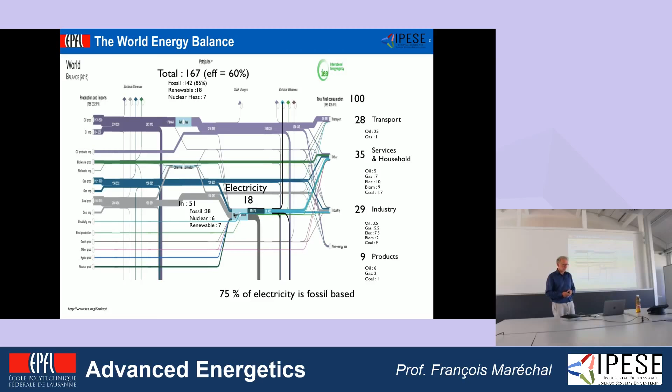Now, if I'm just looking at myself with respect to advanced energetics, what you can see is that you have 30% here that produce 9% of product here. You have refineries that are needed to make the services, but also all the industrial processes here that convert resources into electricity are industrial processes. The same for the distribution of energy; they are all industrial processes, meaning that by looking at industrial processes, we look at the major dimension of energy, the conversion from the resources to the final service and product.

Just to give you some order of magnitude, since I'm speaking about energy, I'm going to use the petajoule, for example, as a reference. So the petajoule... the joule is the way to measure energy.

Each second in the world, we consume the equivalent of 10 trucks of oil. Each second. Okay? And of these 10 tankers, 3 are used for making products, and 1 is for the industry. The rest is used mainly in transportation. Okay?

The gas is mainly used for producing electricity and industrial heat. Coal is in the majority used for electricity and a little bit for industrial heat. And the overall efficiency of electricity production is around 35%. It's just to give you some numbers that allow you to have some orders of magnitude about what we are going to discuss today.

And something which is important: I'm talking about the world because I'm talking to engineers, and you will not be located in a given place or bounded by borders. It's possible that even if you are located in Switzerland, you will work on processes that are in the middle of China. Okay, so there is no border, especially if we talk about technologies. Okay, so we have the big numbers here.

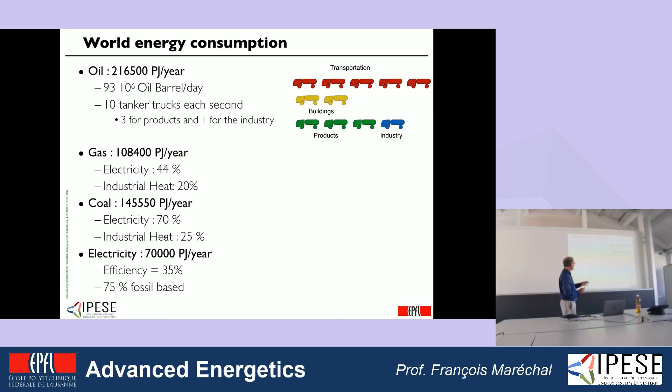Now, if you look at the energy used in the industry, perhaps the most important part here is that around 70% of the energy used in the industry is used in the form of heat, and 30% in the form of electricity. And of course, this varies from one sector to another. There are sectors that consume a lot of electricity, others less.

Something which is perhaps also very important to realize is that there is a very limited amount of renewable energy used in the industry. I would say it's mainly when you have wood boilers used in the industry, and also all the products are more or less only based on fossil resources. So the products are not bioproducts, but fossil-based products. Okay.

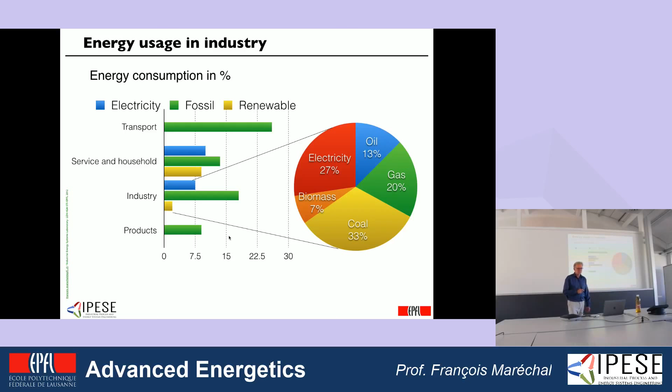Compared to the world, Switzerland is a little bit different, mainly because Switzerland is leaving the heavy industries outside Switzerland, so they prefer to buy steel rather than produce steel, or to buy gasoline instead of producing gasoline. So we have only one refinery in Switzerland. The rest comes directly by trains, trucks, and pipes.

Okay, and that's the reason why the importance of the industry in the energy mix is a little bit less in Switzerland compared to other countries, which are more at the level of 30%. Okay, in Switzerland it is 20.

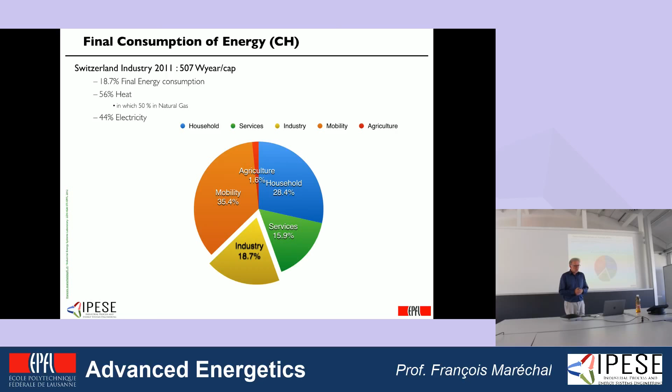So when we are talking about industrial processes, in fact, we are talking about different types of processes. We can have the chemical industry, fertilizer production, fine chemicals, all the additives, so paints and pigments that are added into plastics, for example, or the pharmaceutical industry, which is more what you would picture as an industrial process. But the industry is also the production of cement. It's also the production of steel, and producing food also needs industrial processes.

Okay, you do not just take the milk and put it into a bottle. You have to treat the milk in such a way that you can put it in a bottle in an industrial way. And you can even imagine the production of a car as being part of an industry. To produce a car, you have to melt aluminium, solidify aluminium to make the engine, put the engine into the structure of the car, paint the car, and all those steps require energy as well.

But we can also consider that producing power is an industrial process. If you look at the complexity of coal power plants, you will see that it's indeed, especially today, like a chemical process. But even treating waste is an industrial process, okay? And it's not just burning waste, but burning waste, cleaning the gas, and producing heat and electricity that can be made useful for the rest of the community.

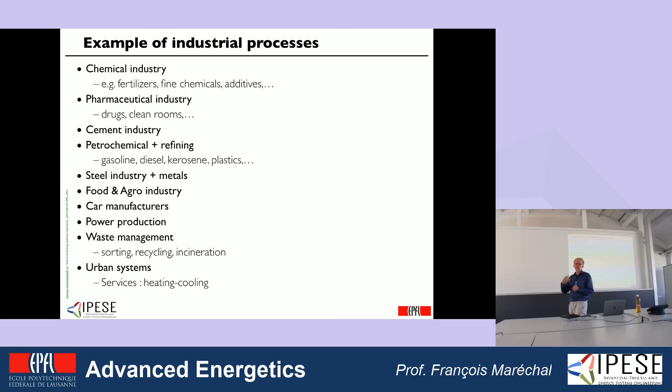And even a city is an industrial process. If you think about a city, not only do you have to heat the city, but you have to light the city, treat the waste, transport the water, prepare the water, and clean the water afterwards. Okay, you have to deal with all the waste produced in the city, and perhaps the best would be to use the waste heat of the industry to heat the city. And if you do this, you do not have to buy natural gas to heat the city, and it would be even more interesting.

Okay, so now the industry is divided into sectors, and the sectors are more or less energy intensive. So, for example, you can see that in Switzerland, the chemistry is by far the biggest, the most energy intensive sector, consuming about 25% of the energy. But then the food and agro, because we have Nestlé in Switzerland, for example. And food typically does not like to be transported over long distances, and therefore people prefer to produce locally, and this corresponds to a certain energy consumption locally.

Of course, in Switzerland, the watch industry is important, the cement afterwards, because we build a lot of buildings, paper, etc. So the steel is quite small. And something which is interesting when you look at this energy intensity, you can see that there are some processes that require a lot of heat, majority heat and a small amount of electricity, like cement, for example, and others like the watch industry that mainly use electricity and a very limited amount of heat.

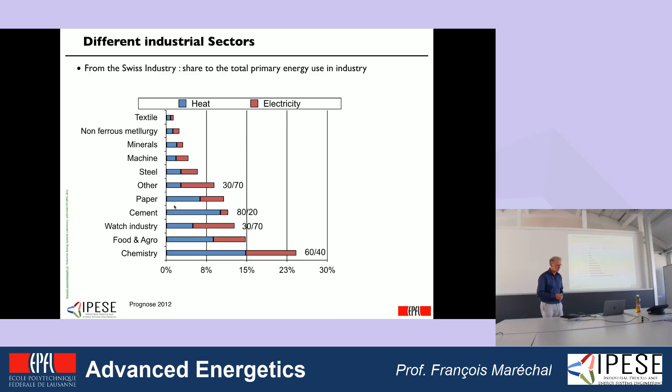Now, what is the challenge of the industry? So you have heard about the energy transition. We voted the energy transition a little more than a year ago, which says that we are not going to renew our nuclear power plants and that we have to comply with our requirements in terms of carbon dioxide emissions, which is going to ask for a strong reduction of the energy consumption. In order to reach this, the industry is asked to reduce by 30% the amount of heat that is consumed and by 36% the amount of electricity. And we have a horizon, 2050, for doing this, right?

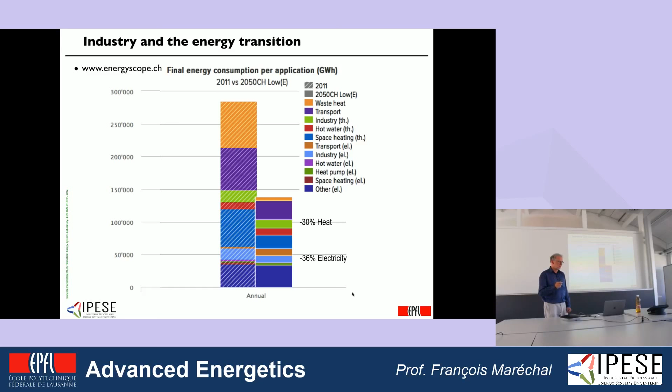And it is the plan of the government, and the government will try to put measures into place in order to realize it, okay? And I would say that a priori, the challenge is on you. In 2 years you will have your diploma. You will be hired in the industry, and you will have to at least realize those targets. Something else is the fact that your company would also like to produce more, because each company wants to grow. And this is going to create an additional difficulty, because if you have to produce more and at the same time reduce the energy consumption by 30%, then you will have to be even more efficient.

Okay, and therefore the challenge is really to understand how the energy is used in industrial processes, so that we will be able to reach the target. And the target is, I want to reduce the amount of energy that is consumed per year while still increasing my production, because I want to increase my revenue, and therefore I will have to compensate the increase of production by improving my energy intensity. And something which is important is that the industry has succeeded up to now. Even though they are increasing the level of production, they have been able to reduce their carbon dioxide emissions, which proves that the industry can do it.

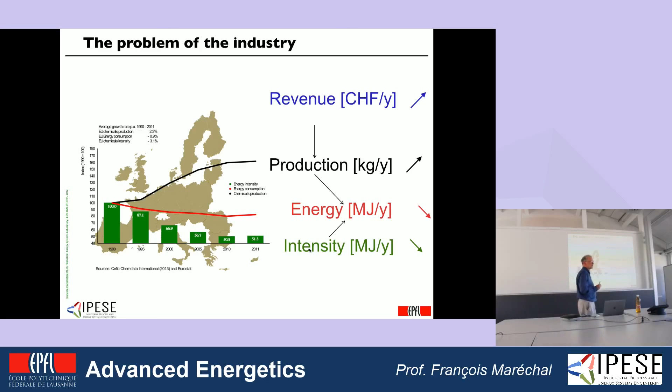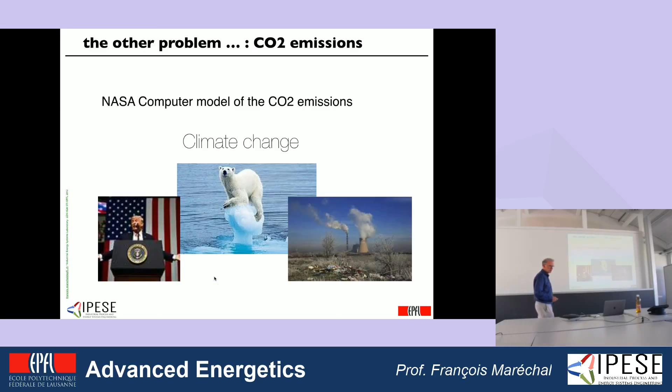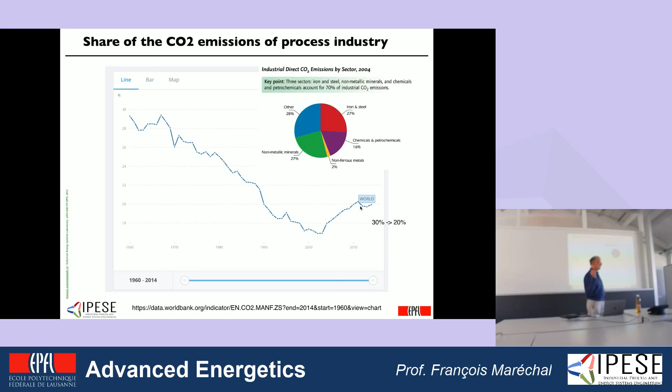So it's the amount of energy needed per kilogram of product, knowing that the amount of product is the amount that we would like to increase, because this will be the way for us to increase our revenues. So the three terms here: the product that will increase, and then the ones related to energy, the energy efficiency, so energy intensity per unit of product, and the CO2 content of the energy that is used, which tells us that we have to try to change the fuels, switching from coal to natural gas, and then from natural gas to bio-natural gas, so that we will reduce the amount of carbon dioxide per unit of energy used inside the processes.

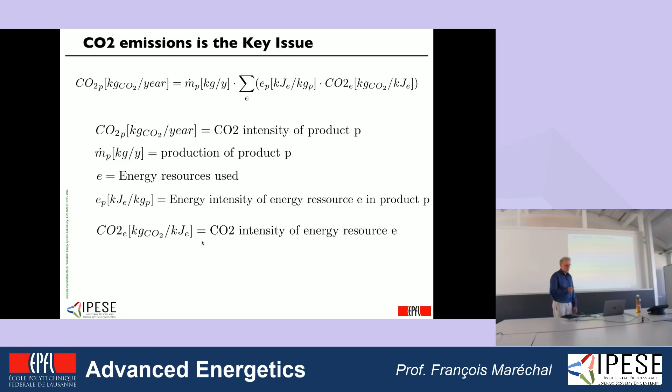When we look at what needs to be done, this is a study from the International Energy Agency. It is declared that half of the effort that is needed in order to reduce the carbon dioxide emissions to a level that is supposed to be satisfactory is coming from efficiency. That's why it's very important to understand the energetics of industrial processes, because we have to increase the efficiency in energy usage. And it is expected that half of the effort is coming from this efficiency.

So typically the International Energy Agency is defining efficiency as being the hidden fuel. Here half of the amount is coming from the increase of efficiency. And then the rest will come from the integration of renewable energy, which means also that we will have to think about how we can integrate renewable energy in industrial processes, right? It's not only for heating buildings, but it will also be for making new products.

And then another dimension which is interesting here is carbon capture and sequestration. So it's the integration of the capture of carbon dioxide. It means that sometimes you will still burn fossil fuel, but you will capture it so that it will not emit carbon dioxide into the atmosphere. And then you will have to find a place to sequestrate it, which is another dimension. So we have to find where we can then store the carbon dioxide that has been sequestrated.

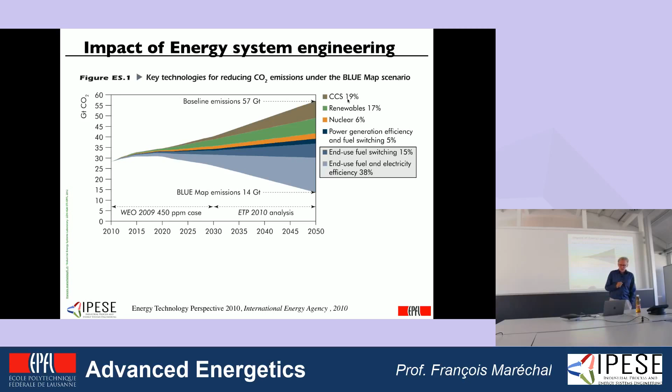Okay, so how do we understand the way energy is used in industrial processes? For doing this, we have to look at what is an industrial process. If I'm defining what is an industrial process, I would say that typically we start with raw materials that we have to transform into products. And what we have to do there is to understand the efficiency of this conversion from the raw materials to products. If we start from a blank page, we will name it

the process design. And just for the anecdote, I was always defining the process as converting raw materials into products, until the time I met people from Nestlé that said, no, we are not interested in producing products, we are interested in satisfying our clients. So our product is in fact not a material, but satisfaction to clients. So we have to be smart, because by changing this approach, they switched from Nescafé production to Nespresso production, which is a completely new, different design. But it's important to realize this: the product can be immaterial.

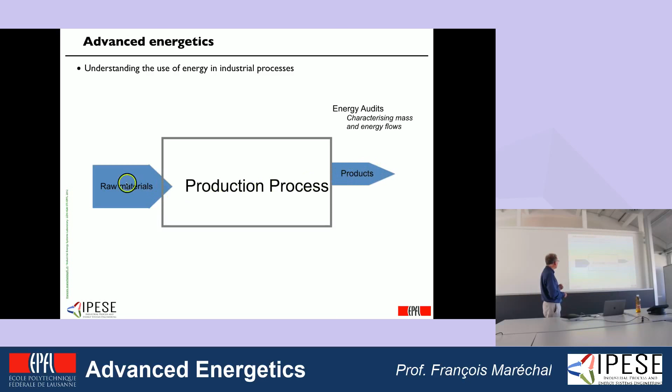But the production process is still taking the raw materials and transforming them, by a list of steps which are shown here, into products. And the first step we will do is to do an audit on what is happening inside the process. Doing an audit means characterizing the flows. The first thing we will do is to write what we name the mass balance. What is the mass balance? It just tells me that the raw material that is entering here, if it does not end up as a product, it will end up as a waste. The mass that is entering my process is going to leave the process.

And so the first efficiency will be to try to maximize the conversion pathway from the raw materials to the products. And there have been a lot of good examples showing that people were smart to transform waste into new products by a new process. So it means that we can afterwards extend the system boundaries in order to limit the amount of waste that is produced. So this is the mass balance. The second dimension is the energy. The energy can enter in the form of electricity and in the form of heat.

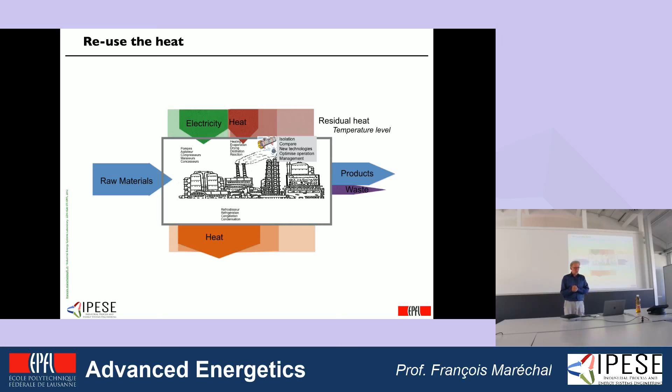Okay. The next step will be to say, okay, can we revalorize the heat. So I still have waste heat that is released, and perhaps by using a tool that is developed by the mechanical engineers, which is compressors, I can perhaps take heat at low temperature and by a compressor change the pressure and then deliver the heat at a higher temperature.

So it's a heat revalorization, which means that I'm going to consume a little bit more electricity to save a lot of heat. Okay, and another part of the lecture will be to try to identify where to place heat pumps and at which temperature and pressure to operate those heat pumps.

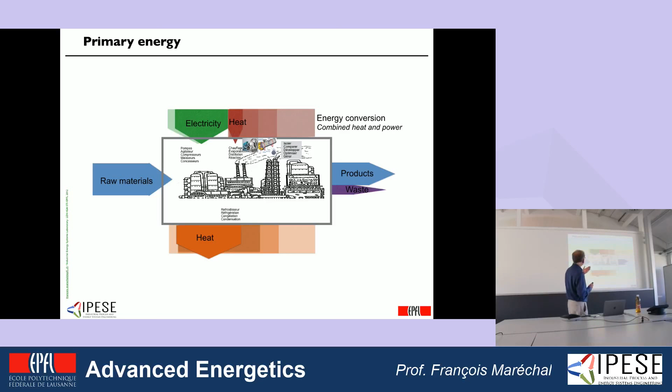When I have identified this, I still realize that I need heat, and heat is not necessarily something that I can buy. So typically you cannot buy heat, you can buy resources. Okay, which means that you will have to ask yourself, is there a good way to supply this heat and electricity? And the answer is, why don't we produce at the same time heat and electricity, because we need both of them. Okay, so this is all what is related to combined heat and power production.

Okay, and of course I could have also decided that the remaining part, that is with the electricity, could be supplied by renewable electricity. So I can also add solar panels on my roofs and perhaps have an additional amount of electricity available for supplying the electricity or the heat to the plant. And in this case, I will have a complete system that is quite well integrated, that is reusing the heat, valorizing the heat, and then supplying the heat in the smart way.

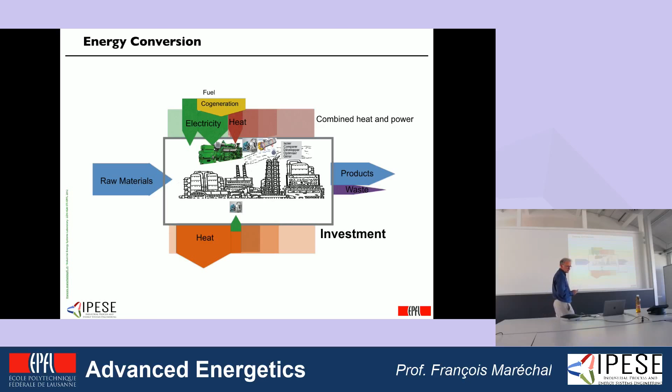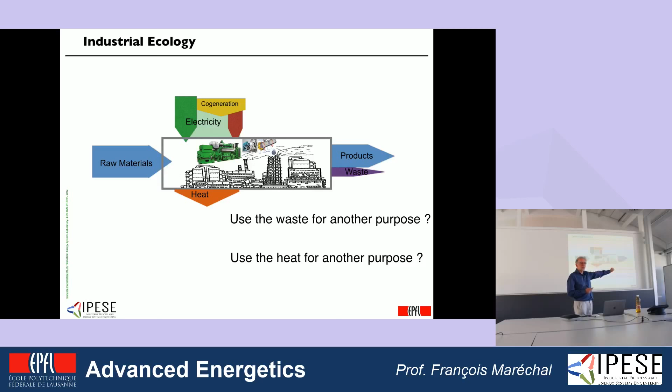But still, look, I still have heat that is leaving the system due to the energy balance. So I have to ask myself, what about reusing this heat? And the answer is, why don't we integrate processes? So instead of having only one process that is going to convert raw materials into product, I can have several processes that can be integrated, that can recover the heat from one process to another one, and that will make more products, and perhaps also recycle the waste or use the waste as a raw material for doing this.

And still, if I'm writing the energy balance, I will realize that I will have a remaining amount of heat, because the heat is always the expression of the inefficiency, and we cannot do perfect processes. But now we will have also to ask ourselves, why don't we use cities to cool down the processes? And therefore, I will ask the question, how do we connect a city and industrial processes? And the idea is that in this case, the best way of doing it is to use district heating systems that are going to harvest the heat in one place and deliver it in another one by using pipes.

Okay? And the trick is that, of course, we will have to size the pipes in such a way that we will recover the heat. That is the waste heat of the industrial processes here, which is much smaller than the initial one. So you have seen that I was starting with the size that was here. Now it is only this part, and this part is going to be delivered in the city. And of course, it's important that I size for the smallest possible sizes instead of making wrong investments by buying things that are much too big. Okay? So those are the different elements that we are going to deal with in this course.

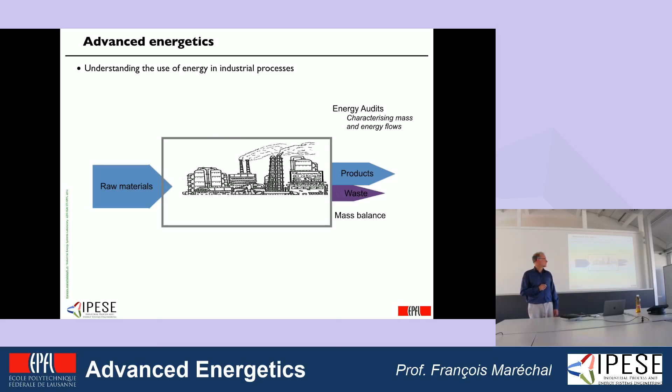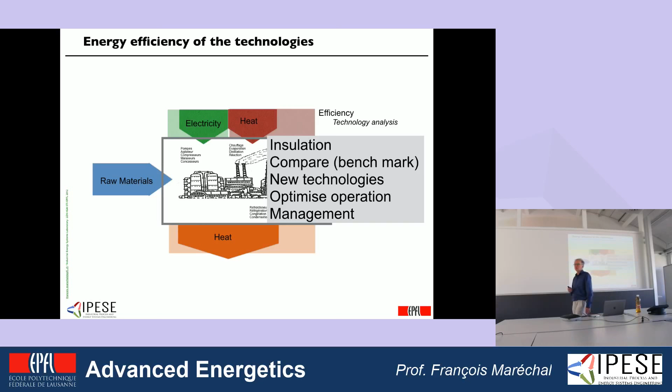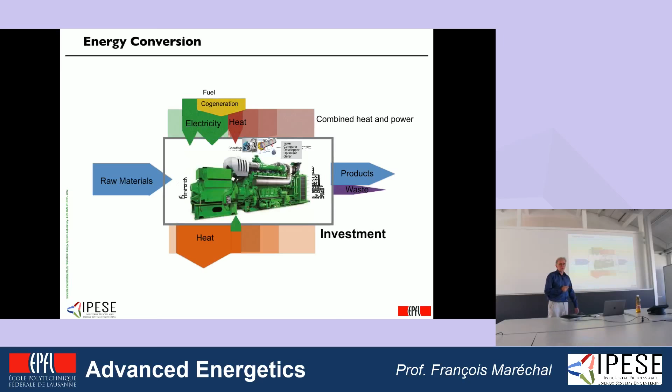So what does it mean? I'm going back. We will study processes. We will understand why energy is useful. We will learn about writing mass and energy balances in industrial processes. We will try to identify how to avoid inefficiencies in process units, how to do heat recovery, how to do heat pumping, or to integrate heat pumping, how to integrate cogeneration, how to integrate processes together, and how to integrate processes, at the end, with cities by enlarging the size of the system we tackle.

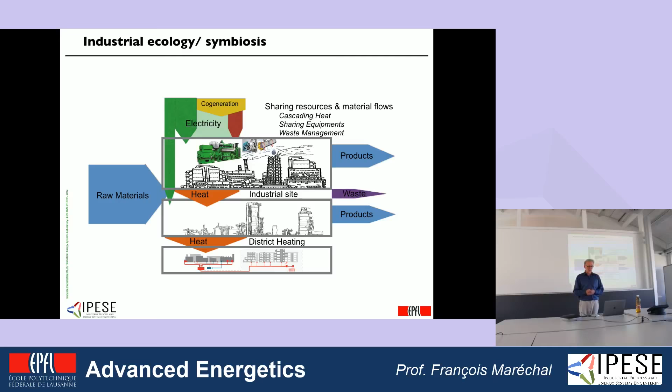So the goal of the lecture will be to try to give you a hint on how to do this job, which means going into an industrial process and being able to identify what is the energy need and what should be the energy needed. What are the investments to be done? So what are the heat exchangers, compressors, turbines, boilers, cogeneration units that we have to buy? What are the system boundaries? And then afterwards, what are the investments?

Because at the end you are engineers and you have to propose solutions that make sense from a financial point of view. And for making investments that make sense, it means that each unit of money that you invest should give you a profit which is bigger than the amount that you have invested. Okay, so it means that we will have to learn how to make those evaluations and to value also perhaps the fact that in the future we will be facing the carbon dioxide tax that would then need to be accounted in the profit by reducing penalties.

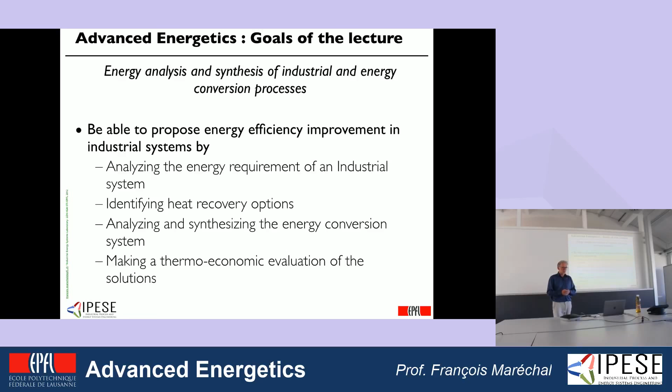So for doing this, we are going to have a lecture. So it's a big lecture. This lecture is 5 credits. So 5 credits means that you are supposed to work 150 hours, more or less, over 6 months. So it's not a small amount. And I must admit that I will use the time that is allocated for the credits. So it's not cheap credits that you will obtain here, because my goal is not to give you credits, but to give you some skills on how to solve the problem.

Yeah, perhaps before I'm commenting this, I would like to just tell you what we will do. So there will be theory, because it is necessary to present the concept and explain how we can solve the problem. And then you will have two different types of actions. On the one hand, you will have exercises that we have prepared for you that allow you to apply the

theory. Typically when I'm teaching, all the students say yes, yes, like this. And then as soon as you give an exercise on what I have presented, then: I have not understood. Okay, I did not understand. So my goal is that you do the job and then you realize where the difficulties are for you. Okay, and so there will be exercises the first 4 or 6 weeks, and then afterwards there will

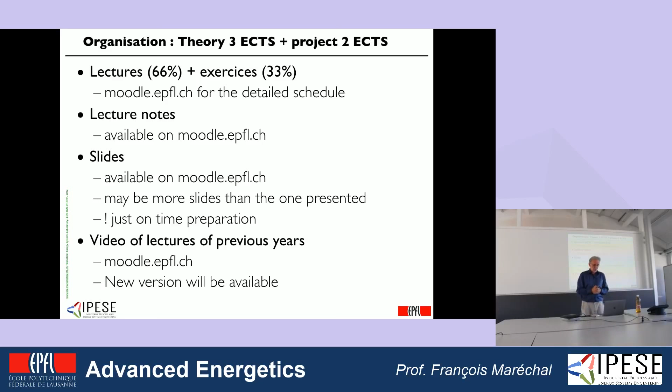Concerning the interaction with me, on the one hand, I will try to ask you questions, and I hope that you will not be afraid to give an answer, even though you are not sure about the answer. Okay, so it's not a real confrontation. I just want you to ask yourself questions. Okay, and then there will be another dimension that I would like to test this year, is that I will always start the lecture, the theory, by a session answering questions about the exercise that you have been doing or the project that you are doing.

And for doing this, we are going to use a tool named SpeakUp, that can be downloaded on computers or on your mobile, in which you will be able to ask questions in an anonymous way each week on each exercise.

And you will have 1 week to ask questions, to read the questions of the others, to vote, to say, okay, this is a question that I have as well, so I'm voting, I want the professor to answer the question, okay? And I will each week start by answering those questions. And when this session is finished, if you are at ease with the exercise and there is no question anymore, it will be very short, or it will be longer. And then when I have finished this, I will start the new lecture.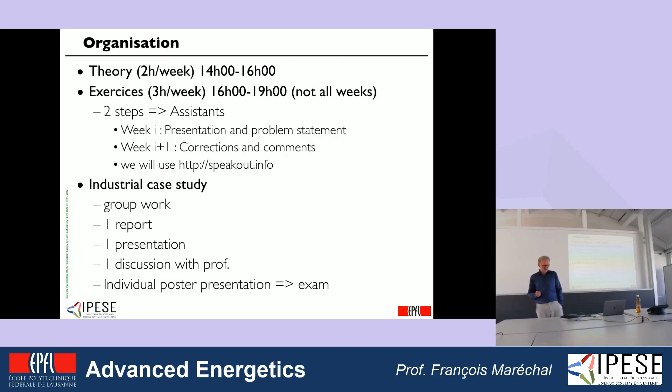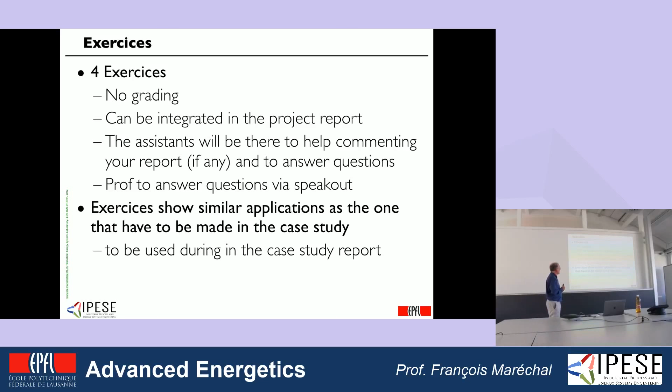So the four exercises, and then something which is important is that the exercises will not be graded, okay? But we will give you feedback if you give us materials. So if you send us a report, the teaching assistant will give you feedback. If you do not send anything, there will be no feedback, okay? And then, yes, I think that I have another one. So this I will skip.

So about the organization of the case study. The case study is the realization of a real project with data supposed to come from an industrial application. You will have to work in groups. So I hope to build groups of maximum six persons that will afterwards be divided into subgroups of 3 that will deal with different values for some of the parameters.

You will have the teaching assistants who will be there. You raise your hands and they come and they give you an answer. There will not be a teaching assistant associated to one of your projects, because as they have to travel sometimes, it's easier to have all those assistants available everywhere. And if you need to meet them, you can even fix a meeting with them. They are all located in Sion. It means that if you need to meet them during the week, you have to set up a video conference with them. But I'm sure that they will be available.

The final report has to be delivered after the winter or Christmas holiday. The exact date is typically 1 week before the exam, but I do not know the exam date today, so I cannot give you other hints than this one. Something that is important is that you are going to write a group report, and you all sign the report. So you are responsible for all that is written in the report. Okay?

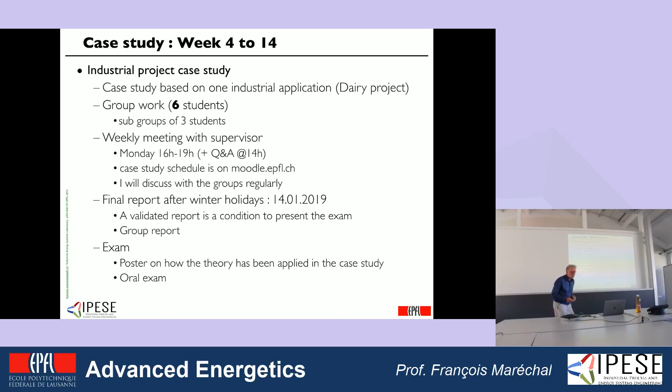Something which is also important is that there will not be a real amount of grades given by the report, because the case study is there to help you prepare your own exam. And at the exam, you will have to prepare one poster in which you will present how you have solved the problem. Okay? And when you come to the exam, yeah, it is explained here.

So when you come to the exam, you will have 20 minutes, and the 3 first minutes will be there to just explain what is written on the poster. So from my side, the best way I know to be really concentrated when you start an exam is to make the summary of the course.

Okay, so that's my goal with this poster. Typically, the students like or appreciate the evaluation, so they say that it's a good way to assess what I have learned. Okay, and I think that typically I'm well in phase between how the students perceive the grade that they have and the grade that they have obtained.

Okay, so something which is important is that it's your presentation, it's not the presentation of the group. You do it on an individual basis because it serves as a support for the exam. Okay, and my goal is that I have to be sure that you understand the theory. So it means that if you have to solve the problem in another industry, you will know how to do it.

Okay, and I don't want you just to explain what you have done, but if you have worked in a dairy process, and now I'm asking you to work in the cement industry, I want to be sure that you will know how to do it.

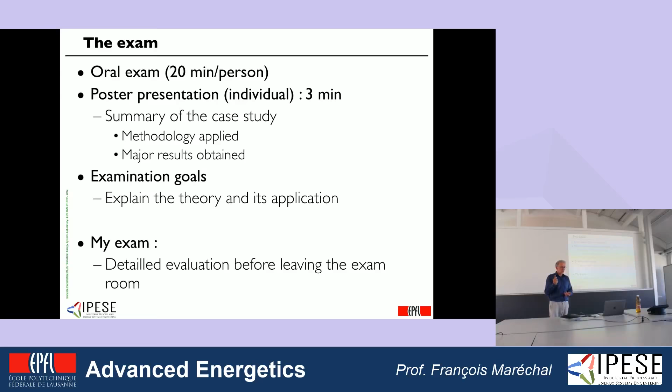Okay, and then to help you prepare the exam, there is one document that is very important that I do not understand why the students are not using it. Okay. But I'm saying this each year, and I'm always surprised. So I'm giving you the list of questions that I'm asking at the exam. Okay? And there are still students that are surprised. Okay? So you have the list of questions.

It is available on Moodle. You do not even have to make a picture. You can download it. And I show you also that I have even added here some bullets that you can fill to decide how much you understand this topic. Okay, so if you do it all over the year, normally at the end you should come with everything fully black, and the part which is not fully black needs to be worked a little bit more.

Okay, and officially I don't see a possibility for you to be surprised by the questions I'm asking. Of course, I will not start with the first one. But the exam is not one of the questions, it is all the questions. Okay?

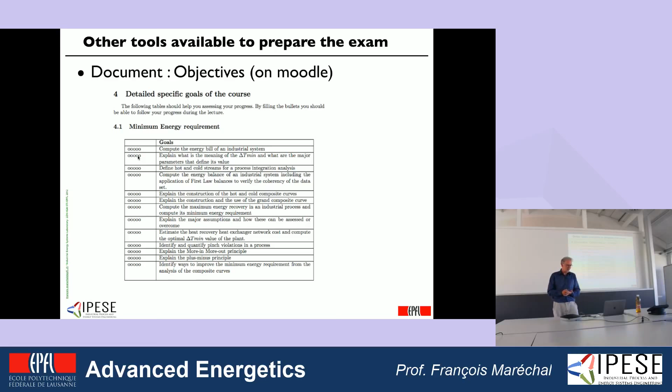So, having said this, I just would like also to give you some, and then I will stop because I have taken a little bit more time. But we have 5 hours, so we make a longer break if you want. Just a last dimension is the feedback of the students from the evaluation and some of my comments.

Slides are not clean and clear, and my interpretation, I'm open to critique, but my interpretation is that it's mainly because you are used to have slides with bullet points. Okay, so a lot of text, because it's easy to consider this as lecture notes. My slides are not lecture notes. You have lecture notes and you will practice, which is the best way to integrate a theory. Okay?

Lecture notes are not well organized, and this is sometimes difficult to interpret. It's mainly because it does not follow the same sequence as the sequence that I'm following during the course. But this is also done on purpose because I don't want you to have to learn something in a linear way. You have to be able to activate concepts.

Okay, and this is the reason why, for example, you will see that there is a part with theory and then there is a part with an application, while in the lectures, we will merge theory and application. Okay, so

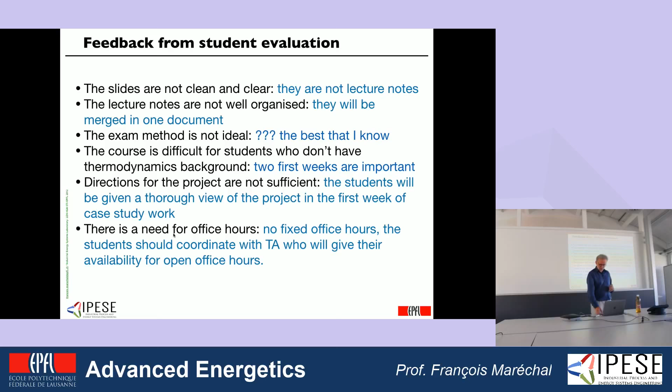So those are the students, and yes, by this I think that I'm going to stop, and I'm going to make a break of 15 minutes, and after the break we are going to discuss how we start analyzing the energy consumption of a process. Do you have questions?

No questions? Yeah. Maybe just about the organization. So we're in a group of 6 and then we're split into subgroups. Yeah. We're going to work on different subjects then? No. So all of you will work on the same type of process. Okay? And it will be a dairy process, okay? And you know that with a dairy you can produce mascarpone, dry milk, etc. And you will have a repartition of flow which will be different between the different groups, okay? And in addition, we can have a dairy process in Switzerland, one in Germany, one in France.

And it happens that the price of energy in France, Germany, and Switzerland is different, which means that at the end, the optimal solution in Germany is perhaps not the one in France. Okay, and so we say, okay, you are the group that is dealing with the integration of mascarpone production in France. Then you study the mascarpone, and at the end, due to the fact that the electricity price is different, you will end up with another suggestion. Okay. But the more you discuss between you, the more efficient you will be in solving the problem.